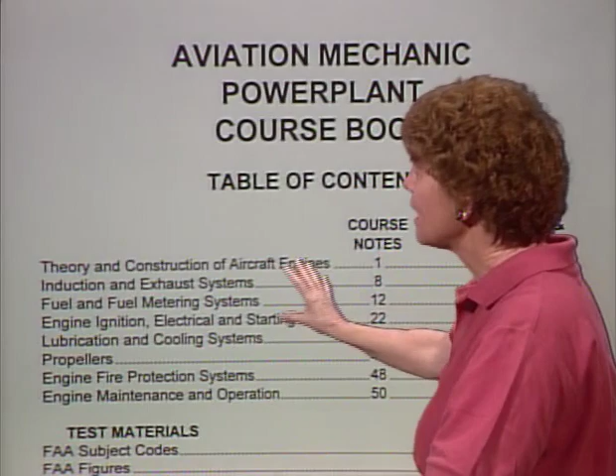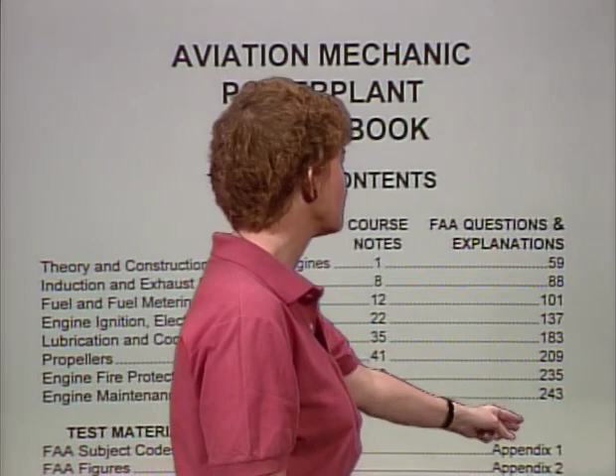Now, right after the course notes, you're going to find all of the FAA questions and the King explanations grouped together, and those also are divided by topic, the same topics as the course notes are, and here are the page numbers so that you can easily find the questions and the explanations.

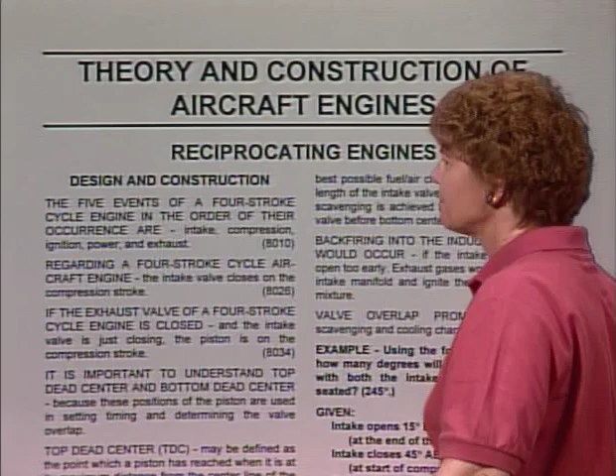Take a look now at the next page, page 1 of your course book, on theory and construction of aircraft engines. These are the kind of detailed course notes that you're going to have on every topic. Notice at the end of the paragraphs there's numbers in parentheses, and what those numbers are is the FAA question number that that particular paragraph is referring to.

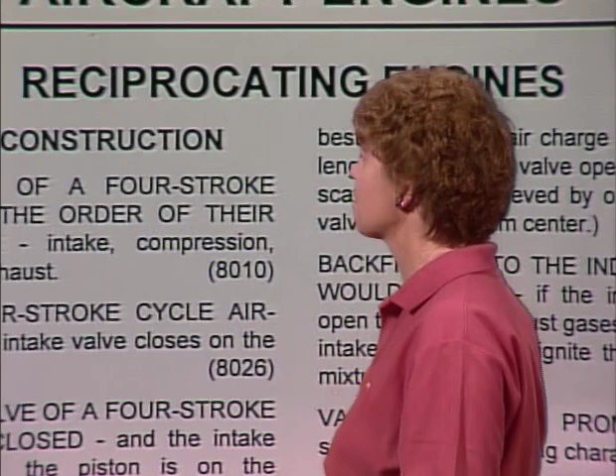So if you read a course note and you want to see exactly how the FAA worded the actual question itself, there's your question number, and you can go and look it up.

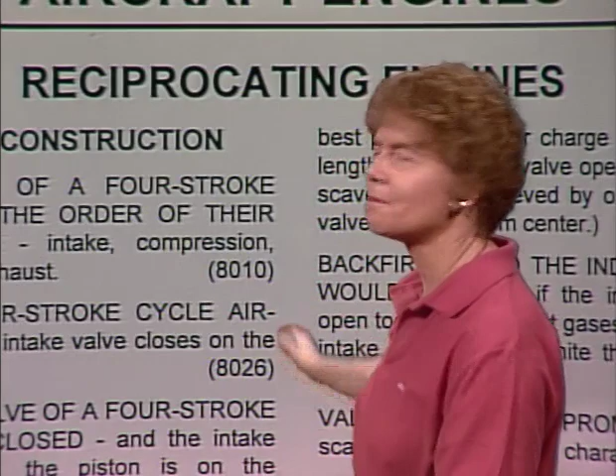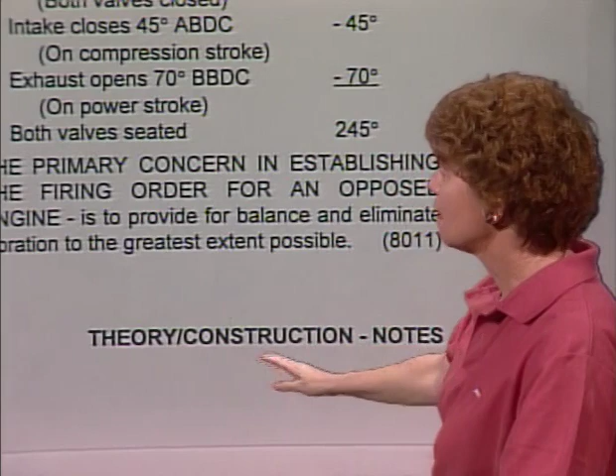Now, on the bottom outside corner of each page, in this case it's the lower right-hand corner, you'll find some memos on whether you're in the course notes, as we are here, or the question and explanation area of the book, and what topic we're covering. So this is the course notes area, the theory and construction of aircraft engines. So just by thumbing through the book and looking at the lower right-hand or left-hand corner, you can tell exactly what area you're located in.

Take a look now at the center of your King course book at page 59. On the left-hand side, we've got the FAA questions divided by topic, just like our course notes are. And on the right-hand side, you've got a very detailed King explanation. And again, down in the lower right-hand corner, you find a reference that tells you that you're in the question and explanation area and tells you what topic we're in.

Now, if you take a look after all of the FAA questions, you'll find Appendix 1. And Appendix 1 is some reference information. The first reference information it gives you is subject matter knowledge codes.

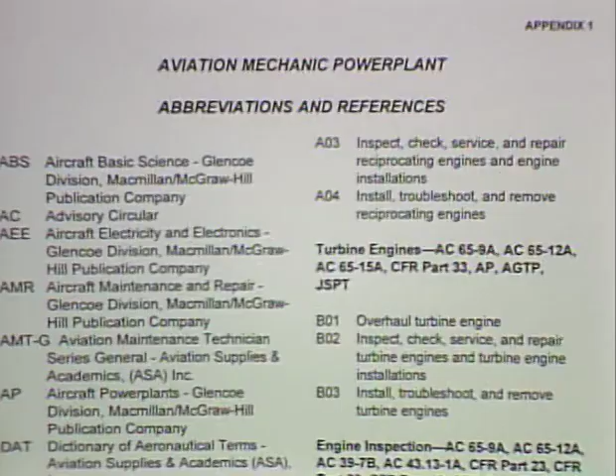When you get your test results back, they will not tell you exactly what question number you missed, but they will tell you the subject matter knowledge codes that you missed. And these are the subject matter knowledge codes, and they tell you exactly what topics each subject matter knowledge code covers. Now, if you've missed something in that, you'd probably like to read up on it. So if you take a look at page 3, still in Appendix 1, it gives you the references.

For instance, in topic A01, these are the different reading materials that relate to that particular topic, so you can find out more information.

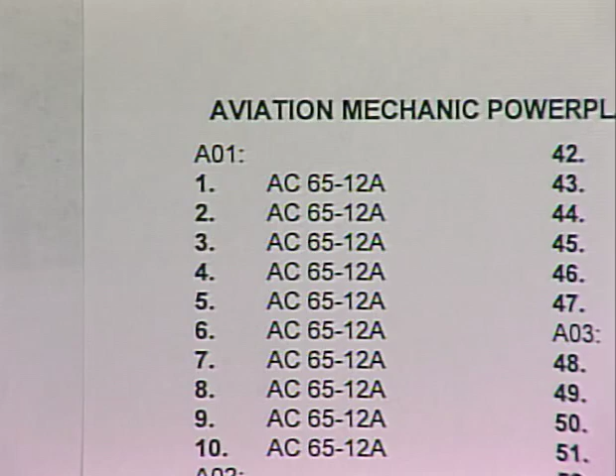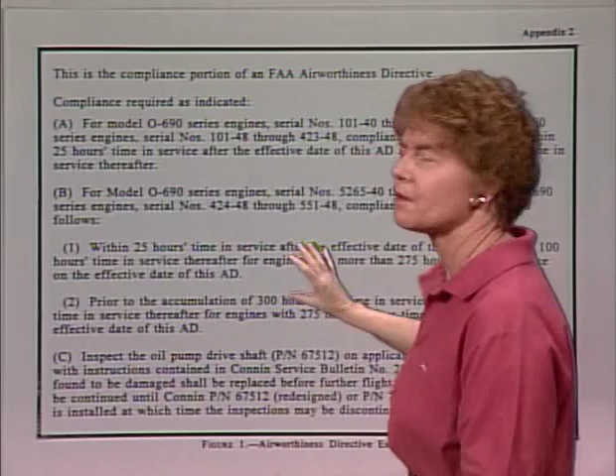Now behind that is Appendix 2. Appendix 2 has all of the figures that you'll be using. That's a reprint from the FAA's computer testing supplement, and these are the figures that they refer you to in the questions in order to solve some of the problems.

In the back of the book, we've got a quick reference on answers to the FAA questions. If all you want is a quick answer, you've got the question number, you want the answer, page A1 is where to go. It gives you that very quickly if you're not worrying about an explanation at the moment.

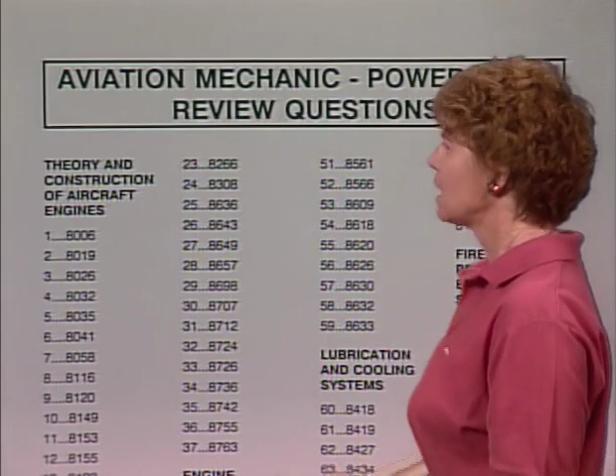Now behind there we've got some perforated sheets, and the first one of those is page R1. These are review questions for the Powerplant exam, divided by topic, the same topics that we're going to be covering as we go along, and the purpose of these is to let you work with the material we've covered.

We'll be reminding you when to take these, but the most fun and effective way to take them is with the King Computerized Exam Review, and we'll talk more about that in a minute.

Behind there, you've got 3 pages of sample FAA exams. These are your graduation exams, if you will, and you'll be taking those at the end of the course.

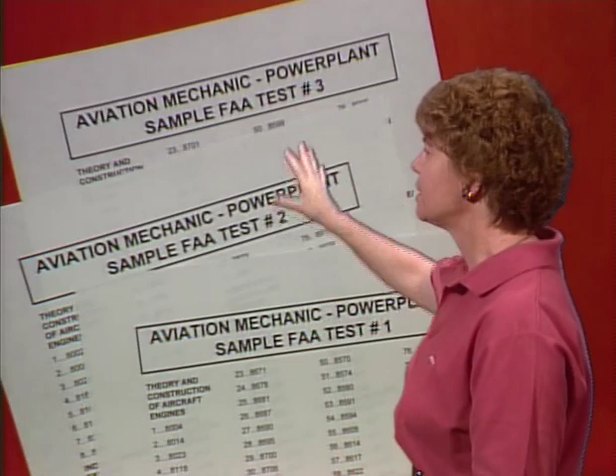Now, currently, there are 100 questions on the FAA Powerplant exam, but the FAA's got a habit of changing how many questions they have on the exam. Doesn't matter, they're still going to be using the same pool of questions, the questions that we're going to be covering right here. So don't worry if you have more or less than 100 questions on your test. We're still going to have covered all the information that you need.

Now, the best way to take those sample exams and review questions is to use the King Computerized Exam Review. It prepares you to take your exam on computer, which is the only way you can take it anymore. There's no paper and pencil testing from the FAA anymore.

Now, if you do not use the Computerized Exam Review to grade yourself on those practice exams and review questions, remember on page A1, you've got all of the questions with the correct answers in a real quick, easy to find format. Now, the review questions and the sample tests cover the FAA topics very well.

But if you have the time, by all means, you should take all of the FAA questions in the book. Here's the reason: the mechanics exams have so much picky detail in them, and the questions are not really very repetitive. If you really want to be familiar with all the information, the ideal thing is to take all of the questions in the exam book.

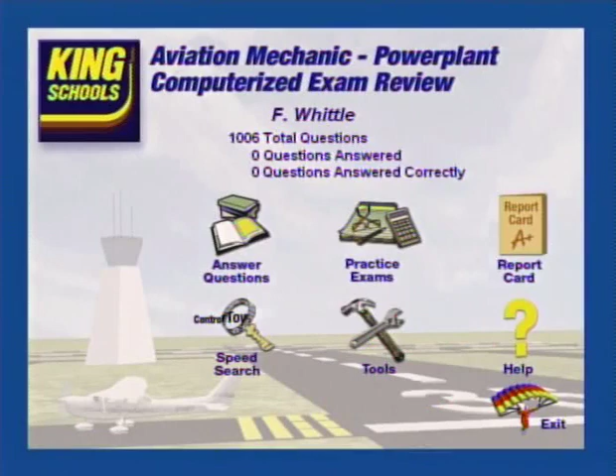Now, you can use King's Computerized Exam Review to make it fun to ensure a Top Gun score. You can choose questions by subject or take them all. Then you receive on screen the correct answer with King's detailed explanation. Your computer will track your progress, allowing you to select unanswered or previously missed questions, and your report card will highlight the areas you need to concentrate on to improve your score.

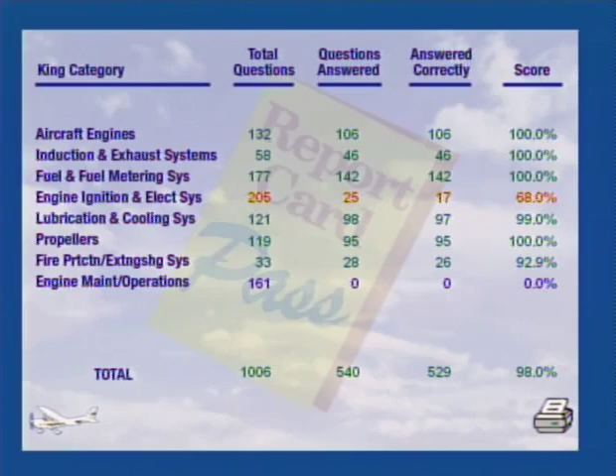The practice exams let you display your test the same way you'll see it at an FAA computerized testing center. And because you'll already be familiar with the computerized testing format, you know you'll do your best.

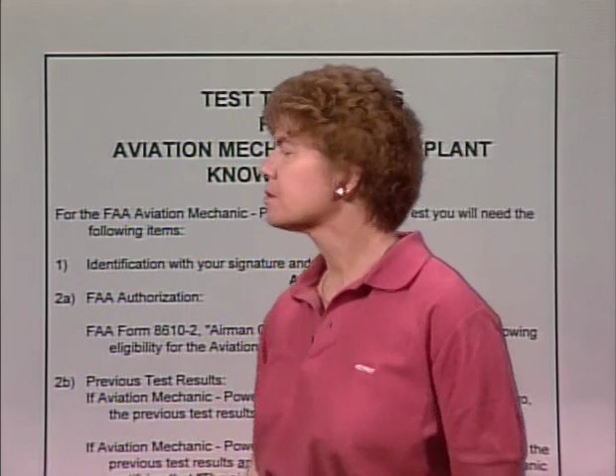Now, in the back of your King course book, there's a very useful page of test-taking hints for the Aviation Mechanic Powerplant Knowledge Test, what we used to call the written exam. First of all, you need identification that has both your signature and your picture on it. Photo ID that not only has your signature but also has your picture.

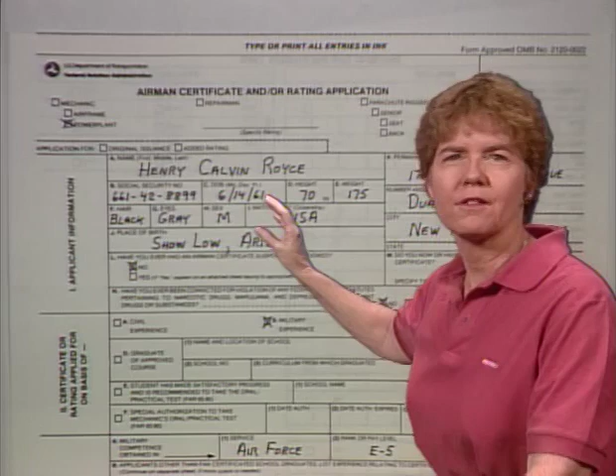In addition to that, you need FAA authorization to take the test, and the way you get that is on your Form 8610-2, the Airman Certificate application. The FAA will endorse that, saying that you are eligible to take the exam.